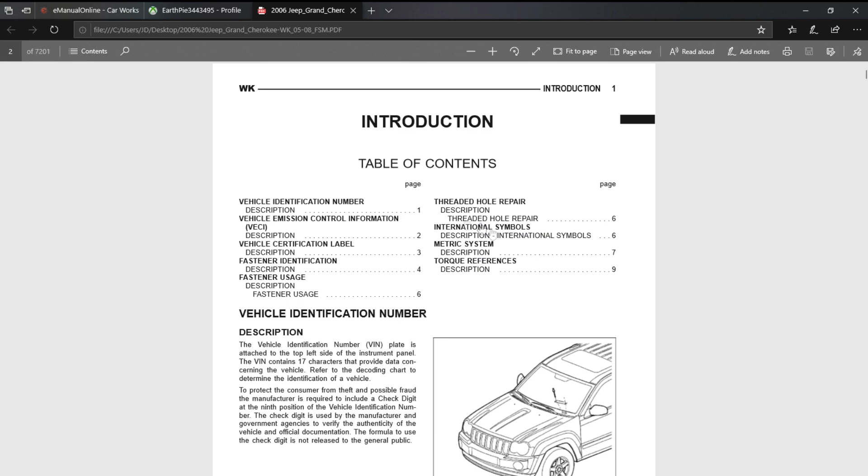All I got to do is, okay, lubrication and maintenance. Introduction is going to tell you about your vehicle. I'll show you your VIN number and what all those numbers mean, and all the different stuff like this. Torque references. Lubrication, your capacities, the types of oil you should use. Just super cool, lots of information here.

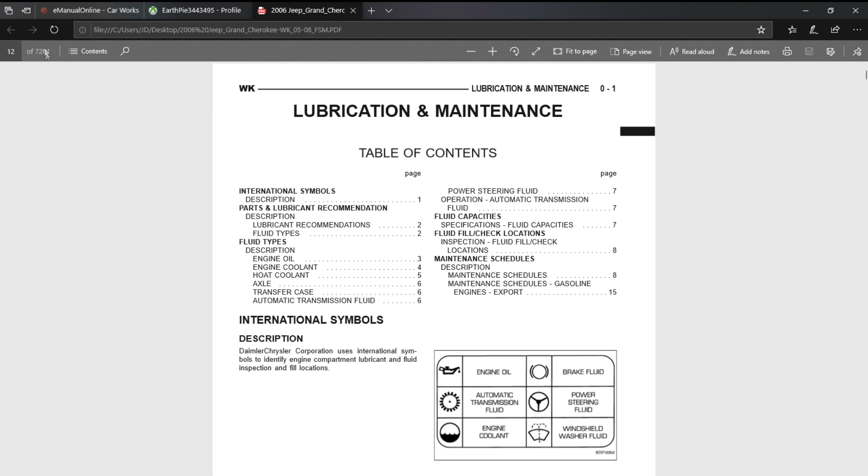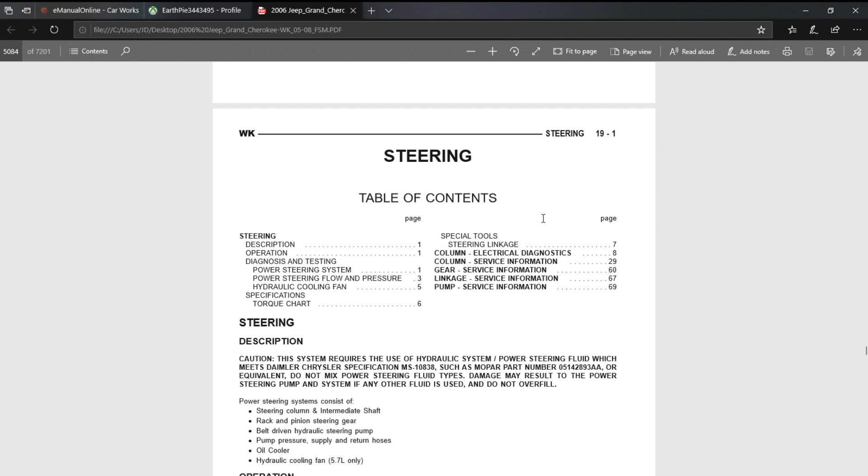Go back to the tab here. Okay, if you guys saw my last video, my steering angle sensor was diagnosed as being bad, so that's going to be the next major repair I'm going to do. So we'll go to steering here, and chapter 19 goes straight to the steering. It's going to give me a description and how it operates.

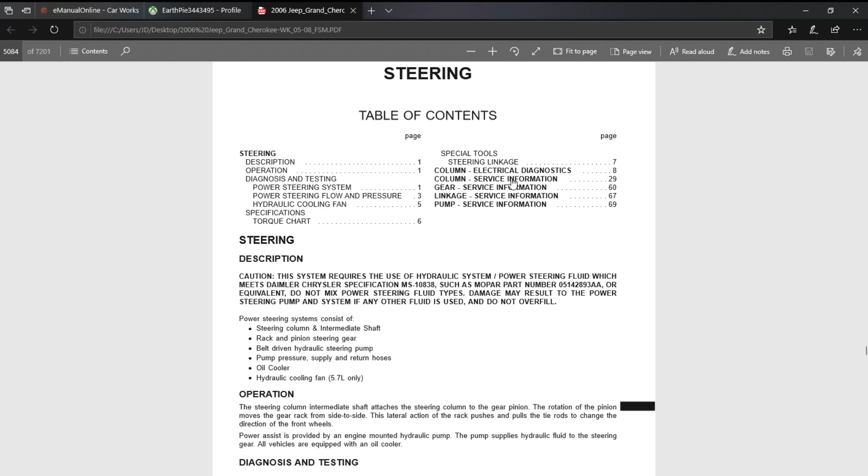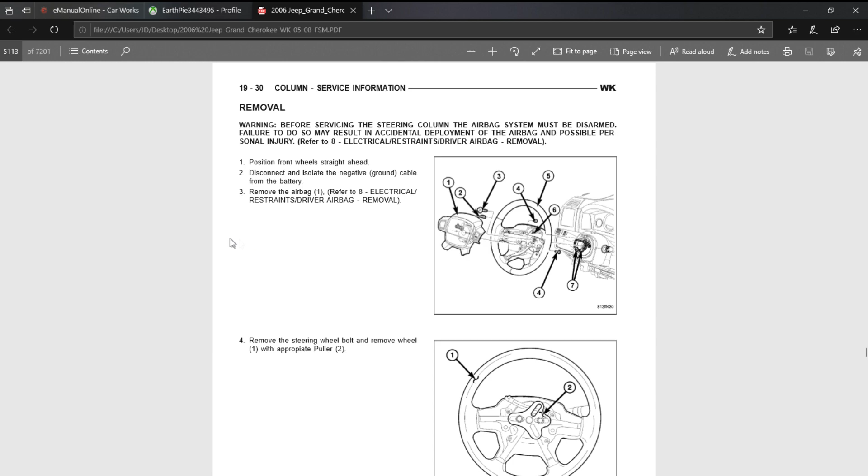So we will go to, let's see, service information, because that's going to tell us how to remove it and install it. Click on that link, and here we go. Do removal, and step by step here.

And if you're not comfortable bringing your laptop or your iPad or whatever down to the garage, I mean you can, which is what I will do. I'm just going to print off 6 or 8 of these, however many pages there are, and bring these pages down to the garage.

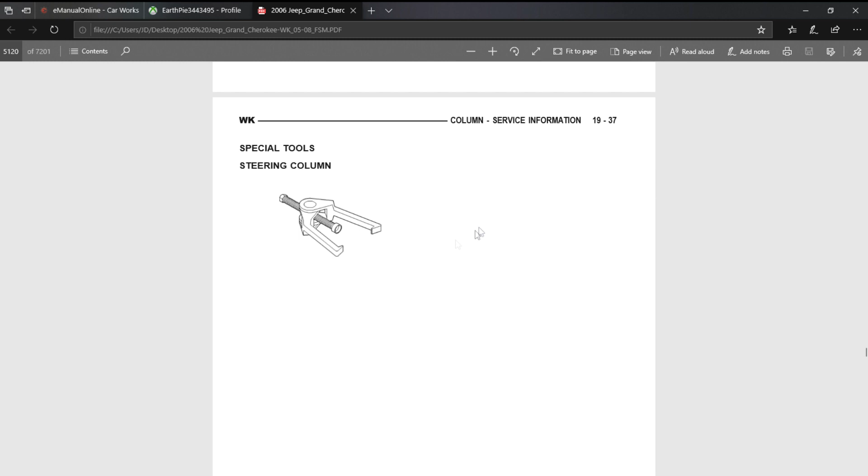Your torques are there. For each section and what you're doing, it'll give you recommended special tools. Special tools are great, and if you could afford every special tool, well then I guess you'd have a dealership. But regular tools typically work too if you're careful, a lot of the time.

So yeah, this is also, you can come here to search, and I mentioned the steering angle sensor was bad. All you got to do is type in the search here, and that's going to bring me to every mention of the steering angle sensor in this section, or in the whole manual. And so then I go up here to where is it?

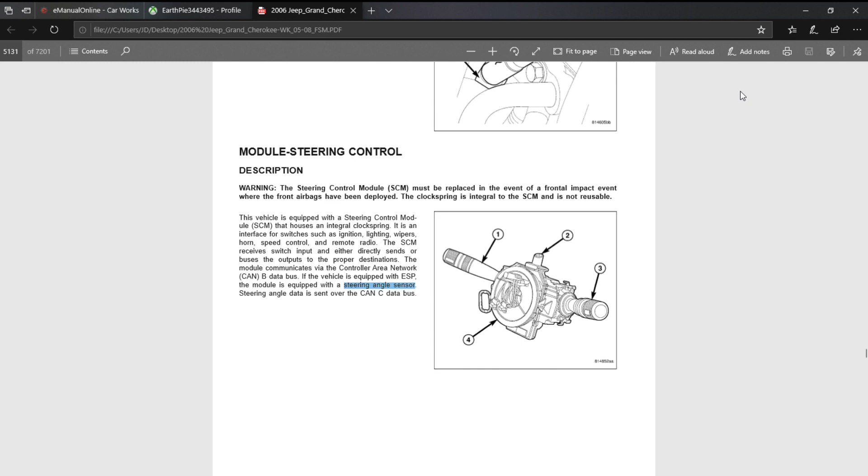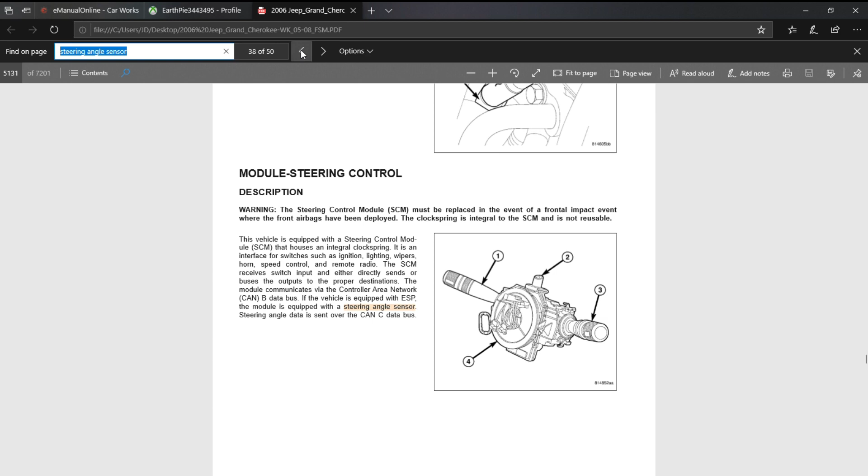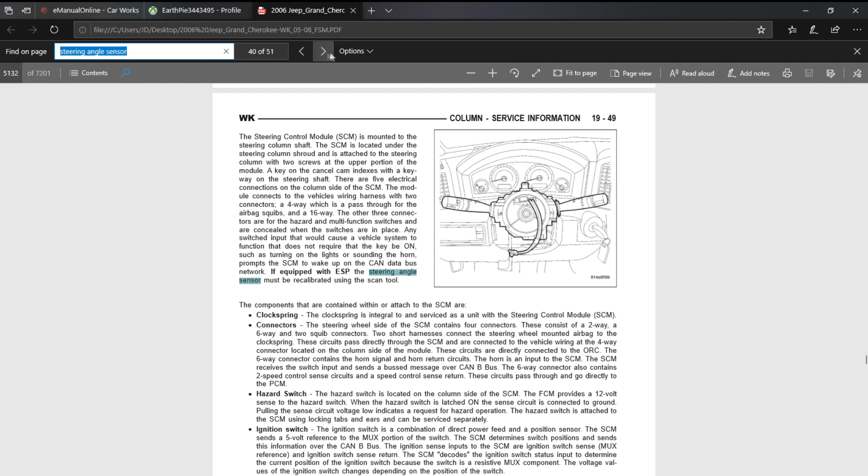Okay, so we're going to search the steering. Oh, right here, yeah, okay. Steering angle sensor, so this would be number 38 out of 50, and I can go up to every mention of steering angle sensor. You can just keep scrolling through. You see it here in the blue, you guys, and where it is here. So yeah, that's this tremendous resource.

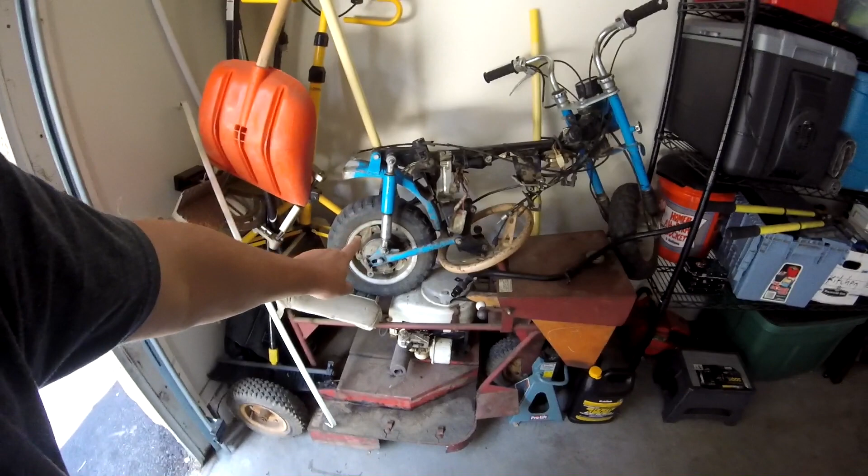And here's that little Suzuki mini bike that I was talking about, 1972, little 50cc. I'm trying to get a manual for that, and also this 3-wheel old ride-on lawnmower. So hopefully they have that on there.